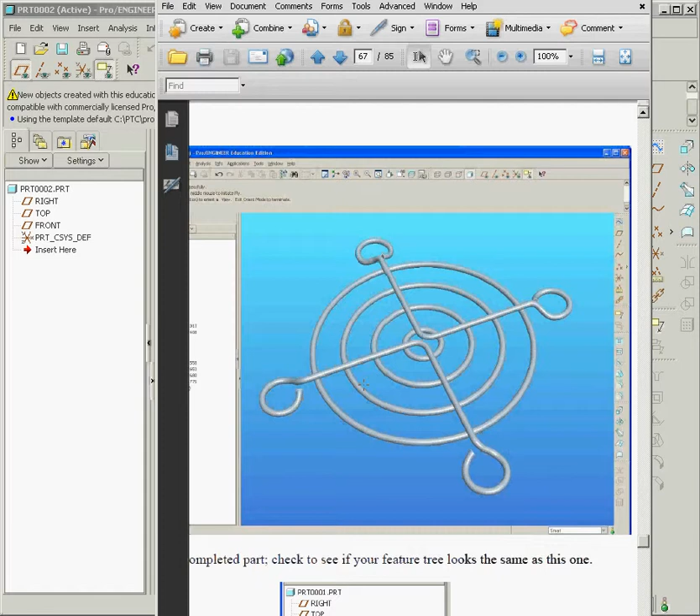The goal here today is to create what you see up on the screen: a fan grill that you would find on the back of a computer. Basically, we're going to use projected curves from a surface and then sweep to generate this.

Let's take a look here. We begin by starting a new part file and select the front plane and start a sketch. First thing we're going to do is build one of the feet. So we'll hit sketch and zoom up until we don't see any dashes between the crosshairs.

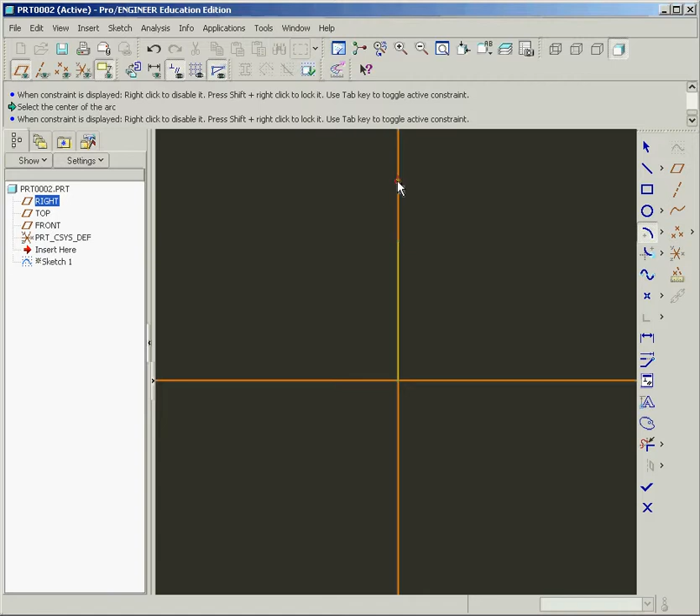Then click in the center here and drag up a vertical line, middle click, and find the center and ends arc. Move it a bit above the line you just drew, click down, connect it to the vertex of the line you drew, click again, and drag around. It'll leave a little opening on the left hand side.

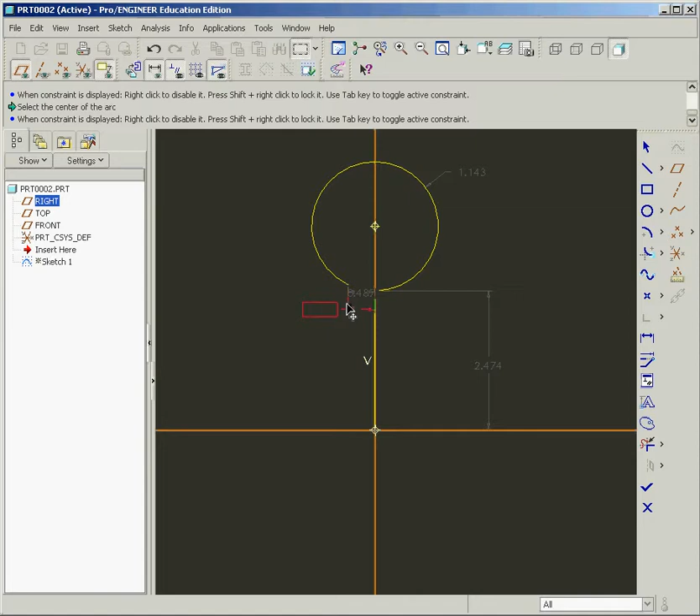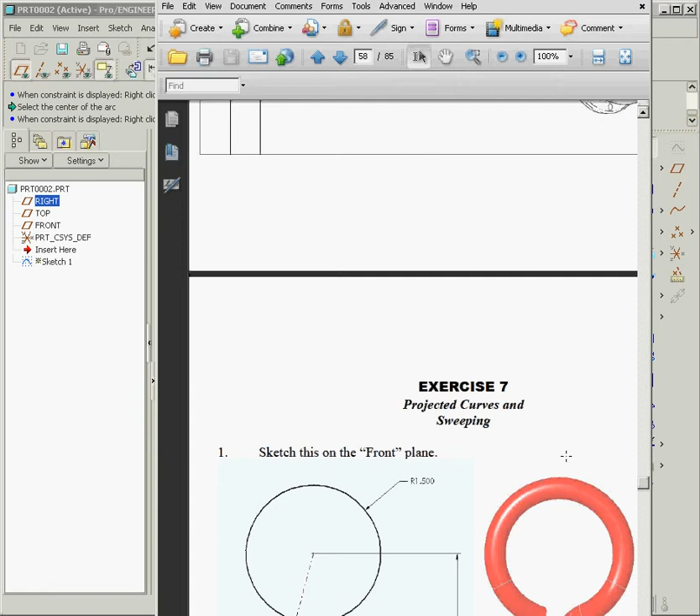Click the middle click to complete it. Now we can see some of the dimensions that are given here. We'll make sure we follow the instructions for the parameters. As you can see, we need a radius of 1.5, 15 degrees of the angle where this point stops according to this vertical line, 1-inch radius, and 4 inches from the center.

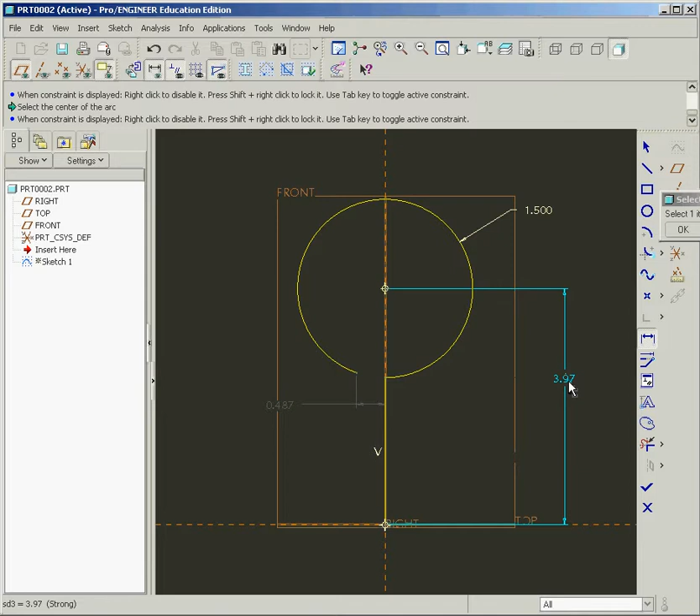So we'll put the 1.5 up first, and we'll add a dimension here. We'll go to the dimension tool, select from the very bottom to the center point, middle click, and that will be 4. Then we want to get rid of this dimension.

We'll select the line tool and draw a line from here to here, and then middle click. If you middle click again, you can select that line till it turns red, right click, and turn it to construction.

Then we could go to the dimension tool and add our dimension between that line and this line here. Now we just put in our dimension of 15 degrees.

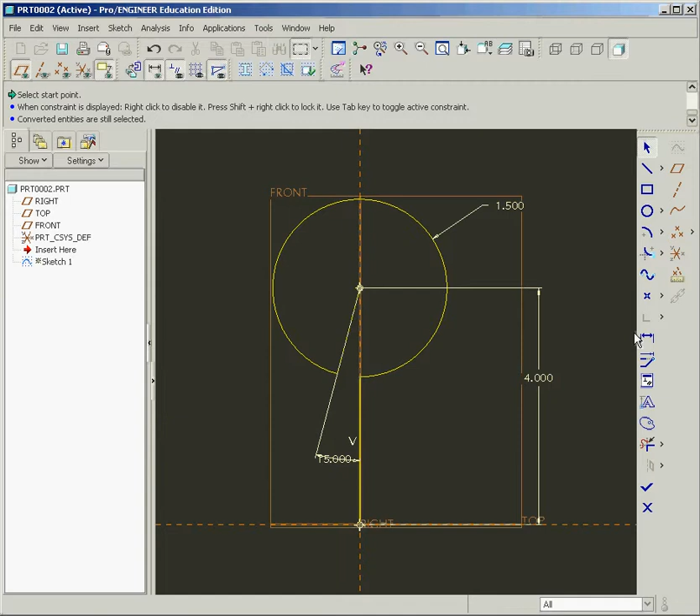The last thing we want to put in is the fillet, or the radius here. So over here we could go to the sketch fillet and select the 2 lines, middle click, make sure that's set to 1 inch, and then trim out the additional material using the trim tool.

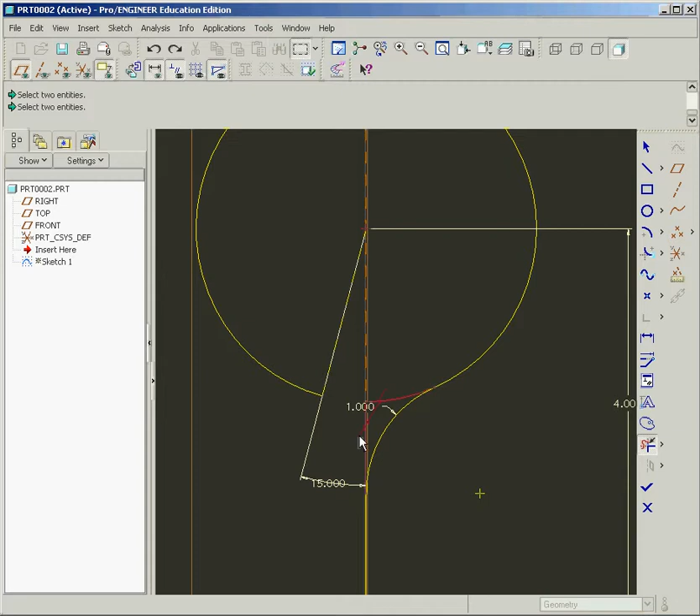Oh, actually did too much there. Not a bad idea, maybe to zoom up and grab it. And you're done. Hit the done tool.

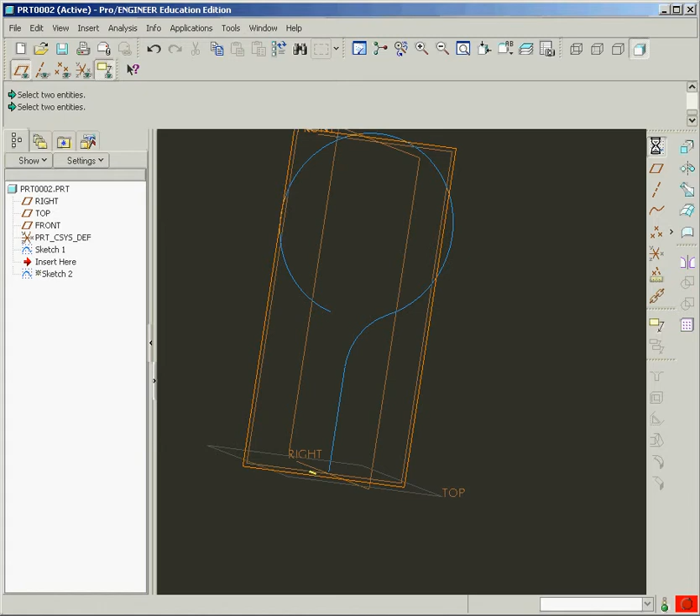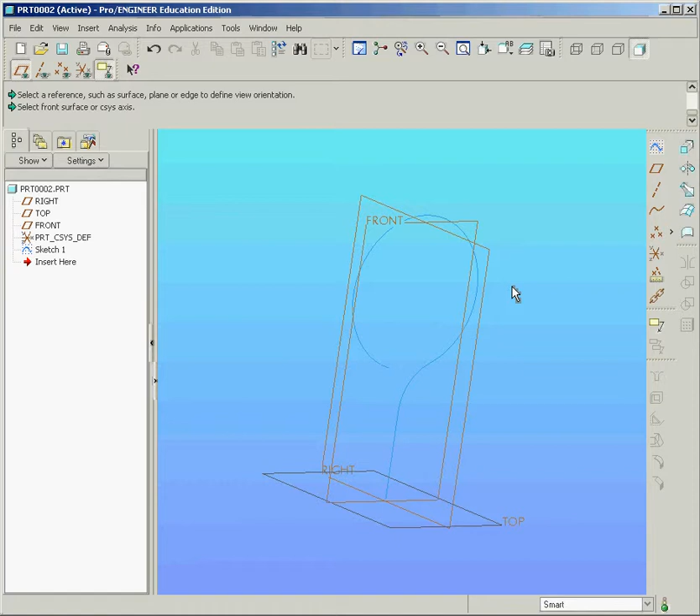Okay, now that that's completed, we can go ahead and sketch on the right plane. So we select the right plane - in this case I accidentally selected the wrong one, so I'm going to hit cancel here. Then go ahead and make sure you select the right plane. Start the sketch, hit sketch.

Now we have to draw the second profile that's in the book here. You can see this is laid down horizontally, so it may not look exactly like your screen, but it's a series of just a line, 2 arcs, another line at an angle, and a horizontal line. So we'll just go ahead and draw that.

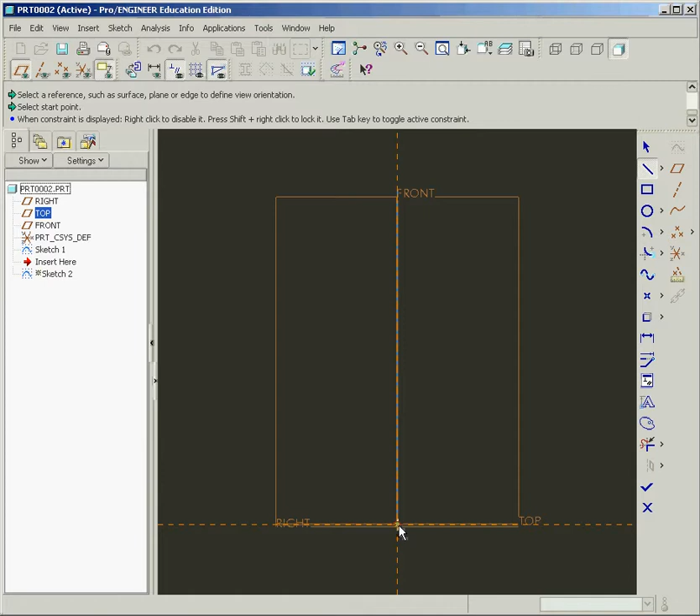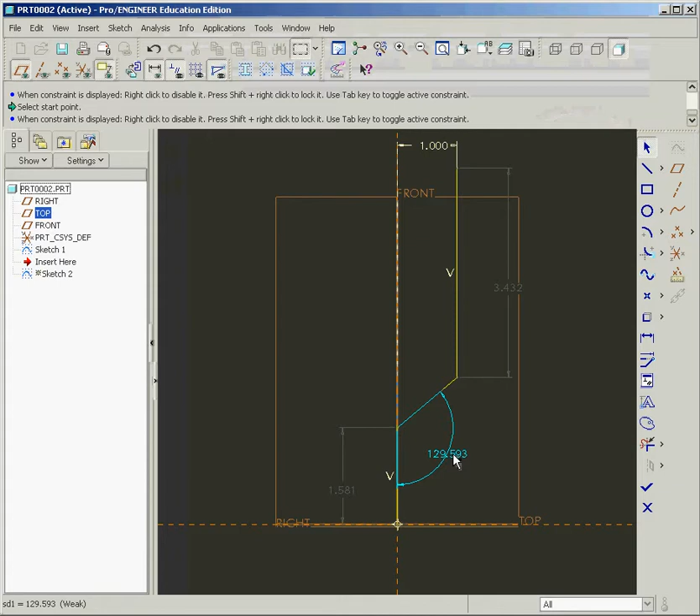Taking the line tool, we'll start off by drawing a vertical line, an angled line, and another vertical line. We'll let the dimensions take some control here. This will be 1 inch, and this is going to be 130. This, we'll set that to 4 right now.

Actually, we'll go ahead and change that in just a moment. That, after the radius, will end up being 2.25. So let's go ahead and put the radius in.

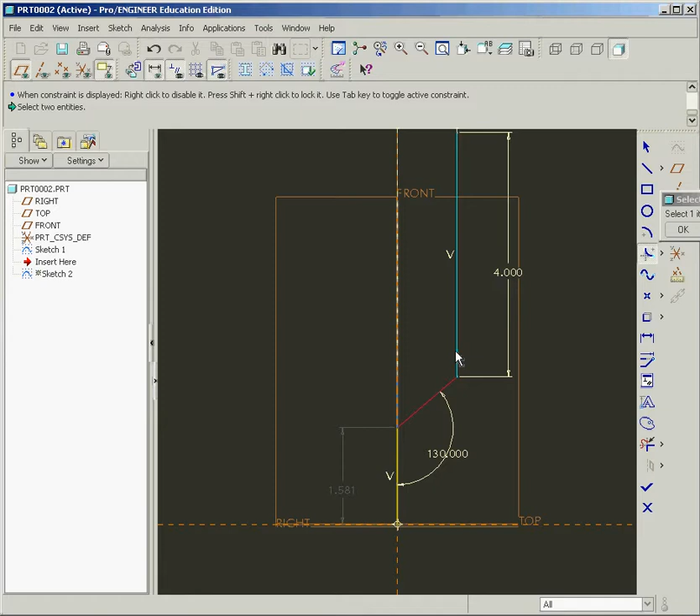So we go ahead and select here and here, and here and here. Now each one of these will be 1 inch. And then we could finalize with dimension here, and that will be 2.25.

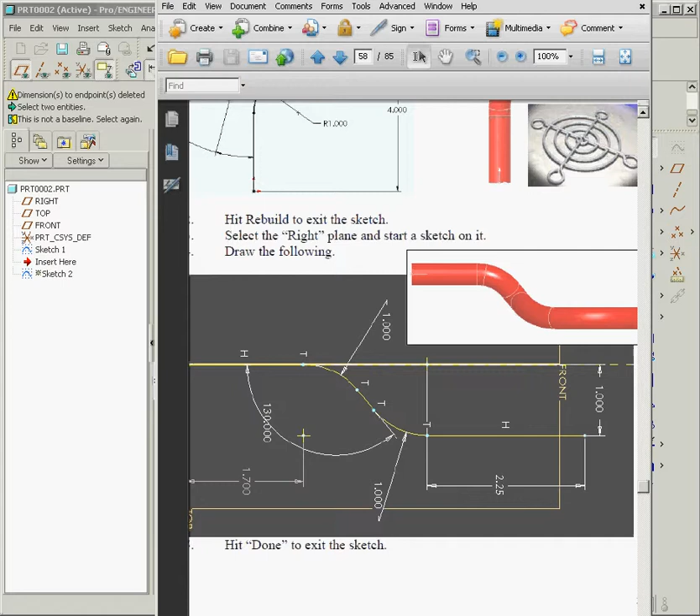And then the last dimension will be 1.7. Okay, and this will be 1.7 here. And that's it. Now we could go ahead and hit the Done tool.

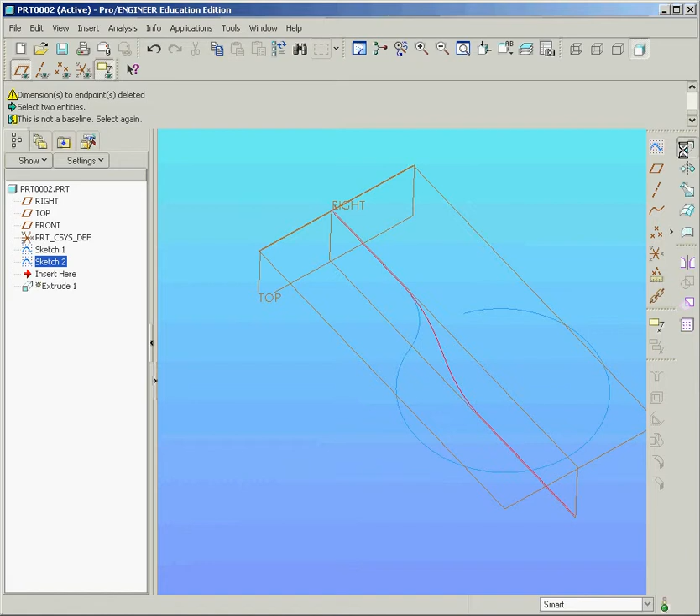What we're going to do with that particular curve is extrude it as a surface. Because it's not an enclosed boundary, we just go to Extrude, and we want to make sure it extrudes in both directions, so mid-plane, 4 inches. And hit the Apply button.

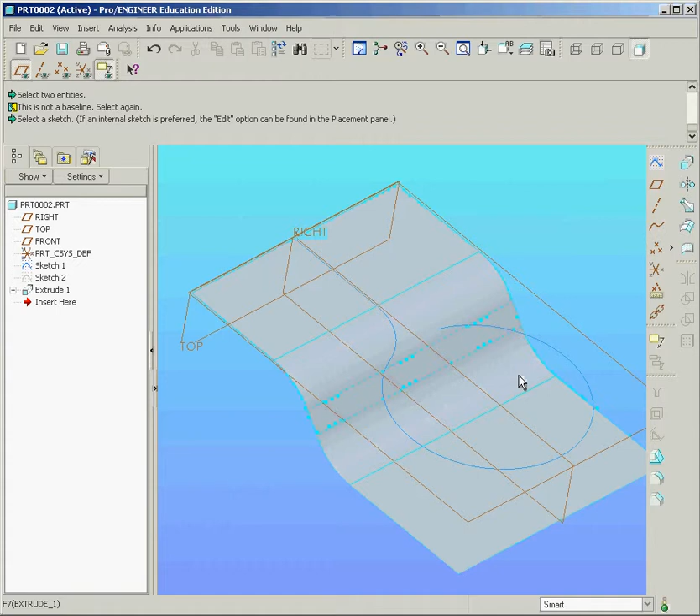The next step is we want to go ahead and project that curve onto the surface. To do that, we find a tool under Edit, Project. Under References, make sure it's Project a Sketch. We could select the sketch actually right there, that's a little question mark looking sketch.

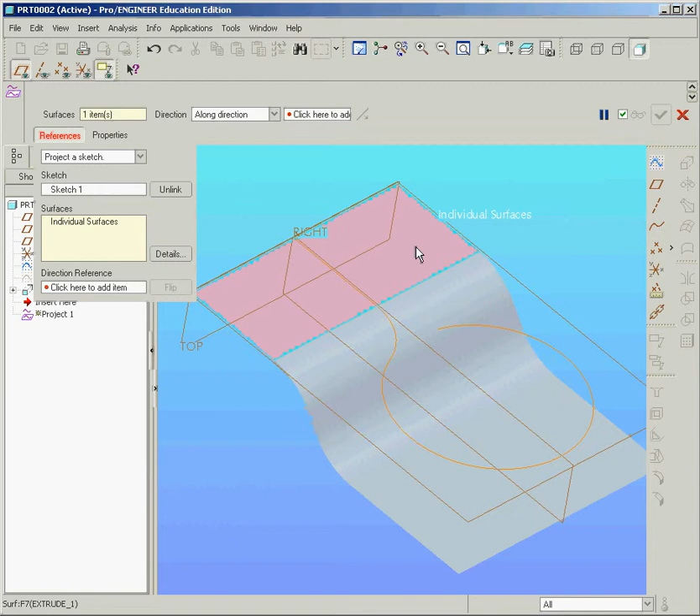And then the surfaces now, we have to go ahead and Control Select all of them. They should all turn pink. And then finally, a directional reference. In this case, you could select the actual front plane and then flip the arrow, so it projects down, and you'll see a preview in yellow of what it's going to look like.

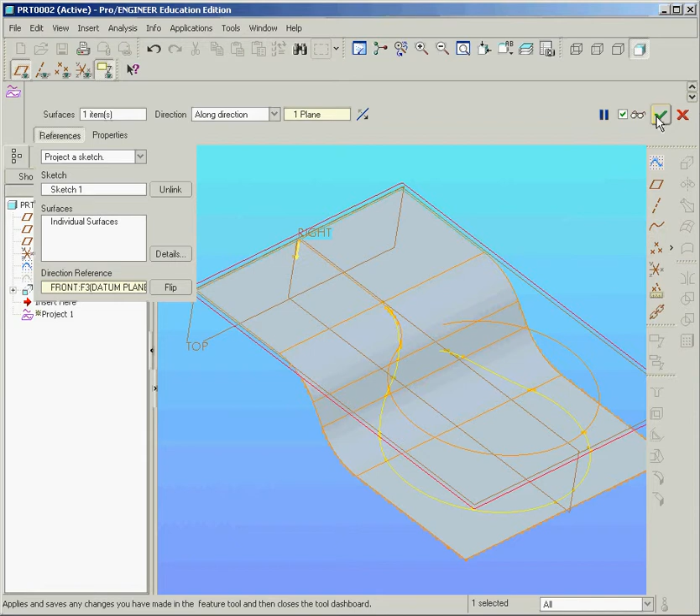And then we just hit the Apply button. Now we have a curve projected, basically a 3-dimensional guide curve that we could use. So now I'm going to go ahead and just right-click on this, click once on the surface, and then right-click and select Hide. We don't need to see the surface anymore. Now we have our geometry.

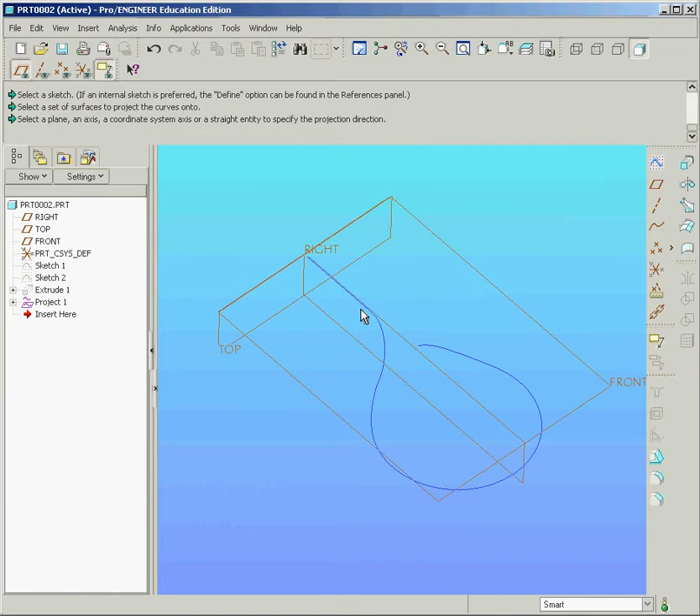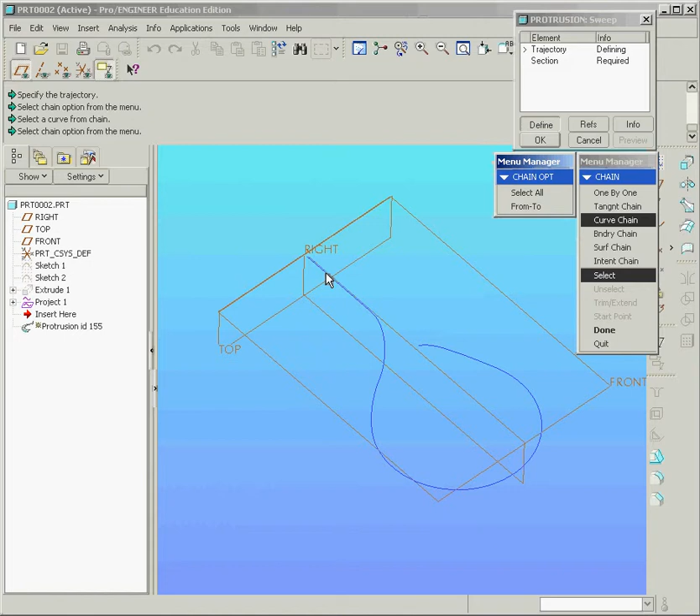So for this now, we're going to go ahead and create a sweep protrusion. We go to Insert, Sweep, and Protrusion. We want to go ahead and make sure we select the Select Trajectory, and we could go ahead and select from the menu manager, be sure you select Curve Chain, and select somewhere around here, and select all, and you should get a little arrowhead there.

Now if that doesn't come up, you could click on Start Point and flip it, and if it comes up somewhere else, make sure it comes up on this end, make your life a little easier. And then hit Done, and OK. And now we're sketching.

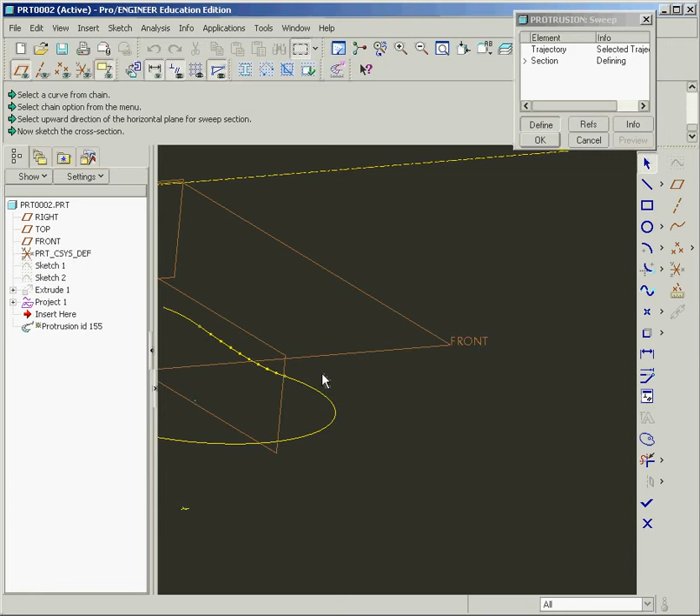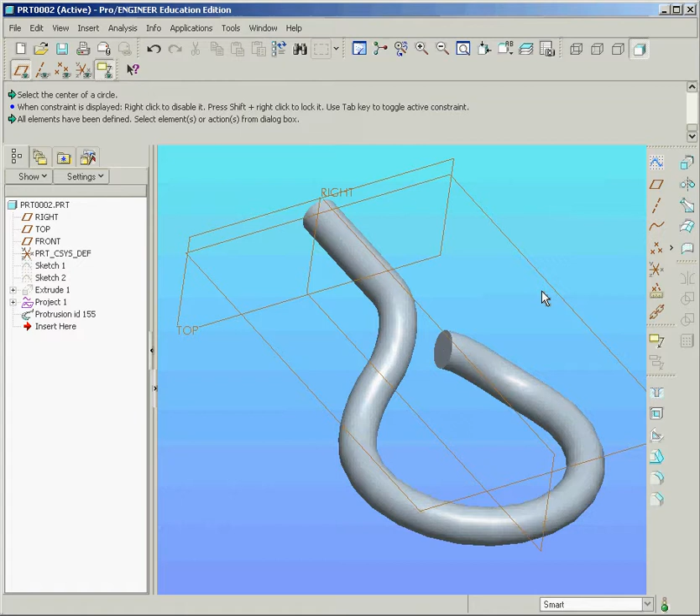Now what we want to do is sketch a 1/2-inch diameter circle on that point. So we just go to the Circle tool, sketch that out, type in 0.5 actually, hit Done, and OK. And it sweeps our hook across. So there now we have our hook part of our geometry that we needed.

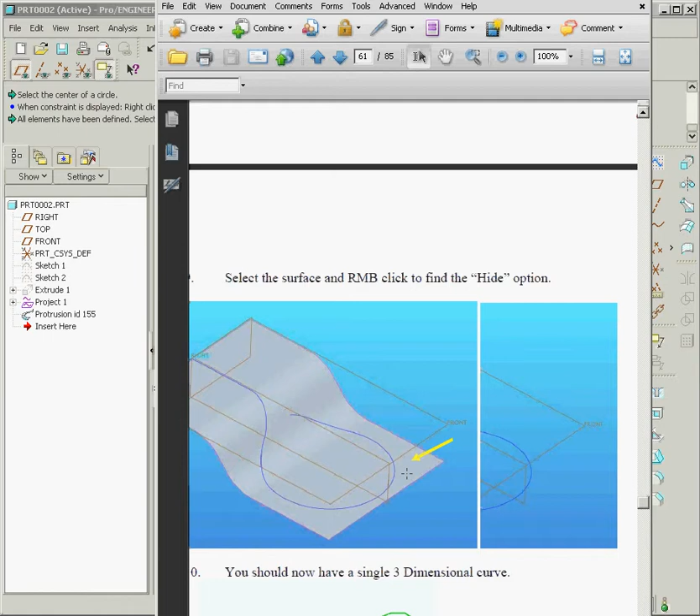Moving along here, now the next stage is we're going to go ahead and add another feature here. We're going to make an extension. Now we could have done this all in one shot, but I just didn't want to have too much information in the sketch initially. Not that it would hurt anything, but for a learning experience, let's just take bite-sized chunks versus trying to do the whole thing.

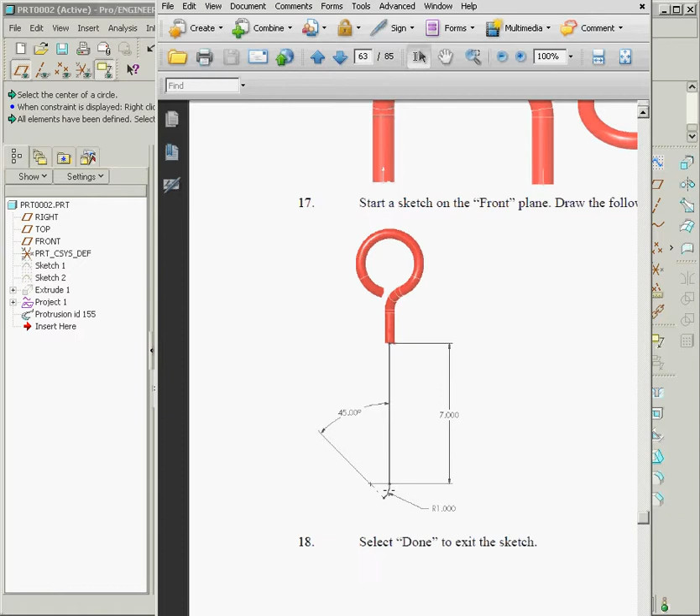And what we're going to do is we're going to end up drawing just a 7-inch line off of there, and then a 1-inch radius that's cut off at 45 degrees. The reason for that is so we can mirror it after it's swept through and get a 90-degree elbow, as you see right here.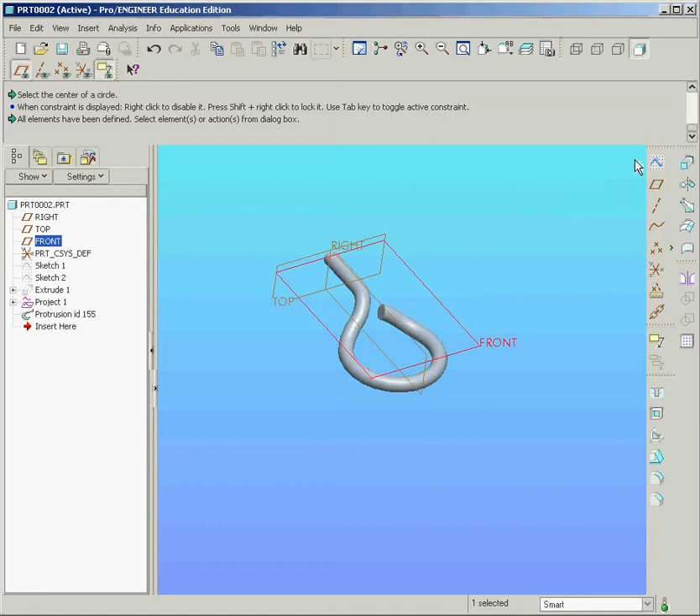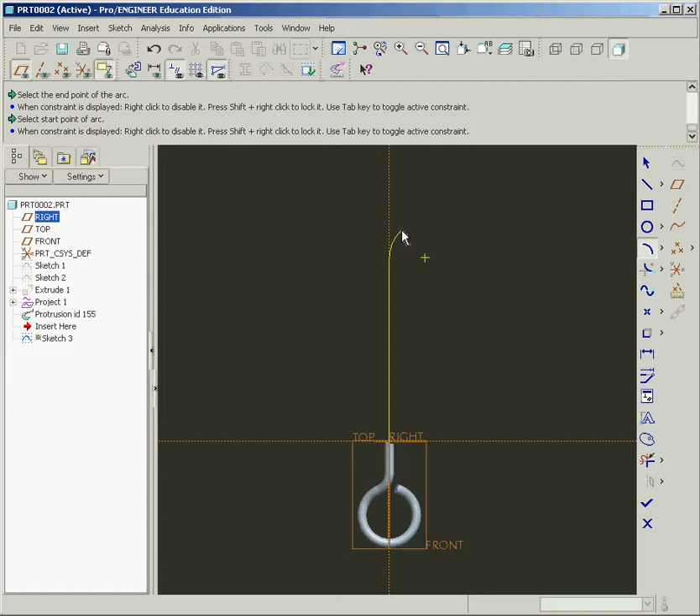So let's go ahead and do that. 7 inches, 45 degrees. We could select the front plane to start our sketch. Zoom out. Draw a line right at that point. And then go to the tangent arc and click, actually wrong one there. Click and drag it straight out and to the right a little bit. Make sure you don't snap to 90 degrees.

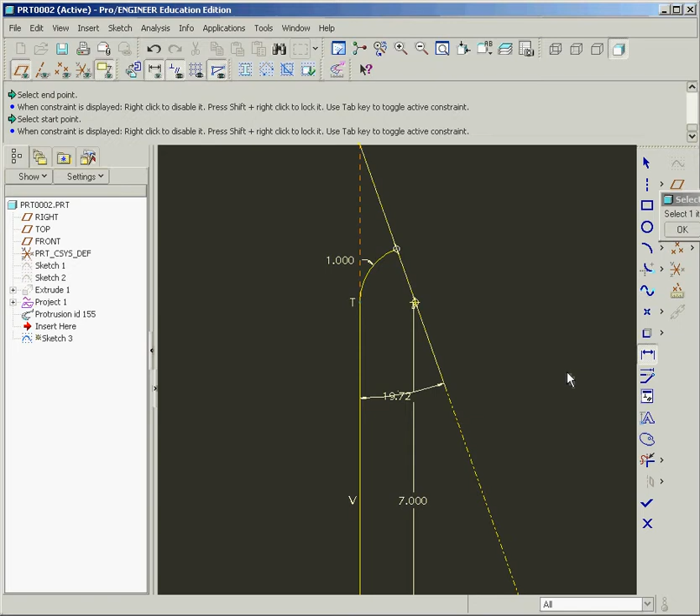Then put in the dimensions, 7 inches by 1 inch, and we could actually use a center line here, and instead of having to do all that extra information, just put a center line between those two and use the dimension tool to constrain that, and that will be at 45 degrees. Now we could just hit the check mark to apply.

And now what we want to do is we want to go ahead and take that geometry and do another sweep protrusion. So insert, sweep protrusion.

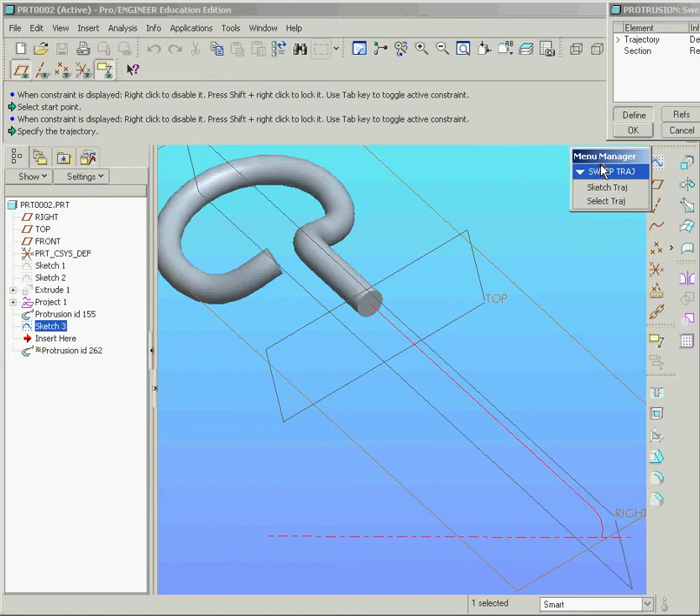Under here, make sure you select trajectory and curve chain. Select near the end there. Select all. Now in this case, I'm getting my arrowhead over here. This is where I could select start point and hit next, and it will move it over here. Unfortunately, we don't get a good picture of it, but we could accept that, and now you'll see it's there.

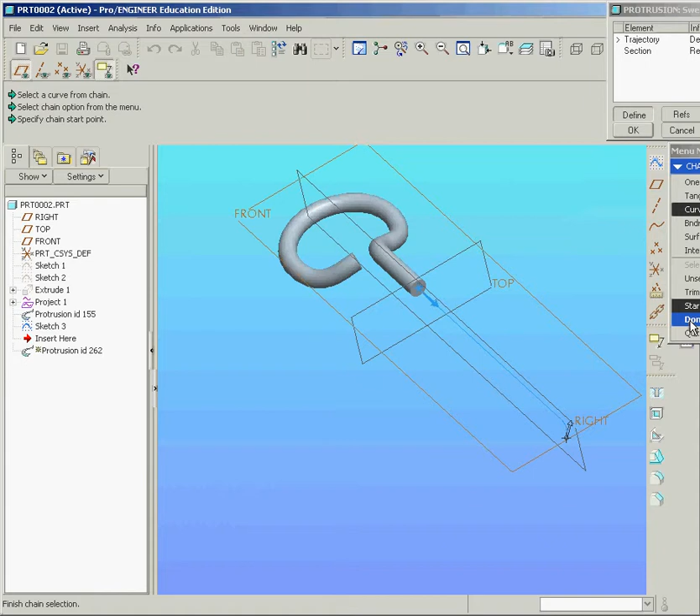So we hit done, and done, and it will start sketching on the end of that.

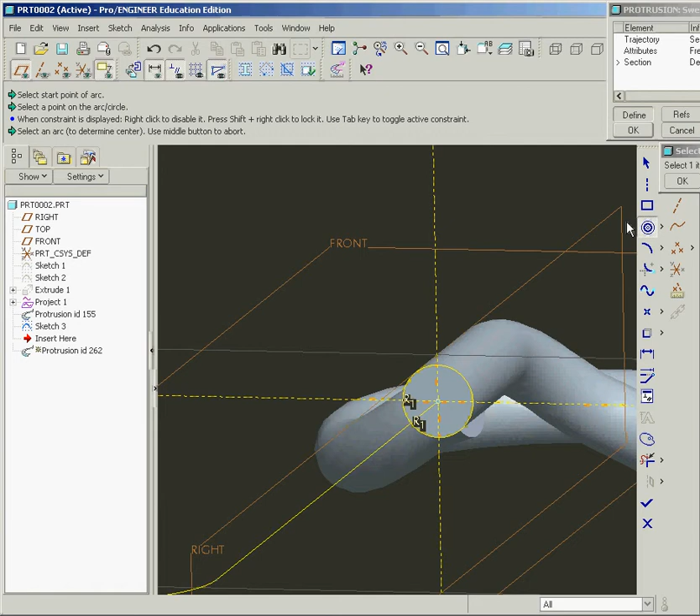Now what we can do here is steal this edge by using not the circle tool, but the concentric circle tool. So concentric circle. Select this edge here and make sure you get the R1s to snap. That means it has a relationship to make it equal to the other side. Hit OK and hit OK. Hit done, and then you could hit OK.

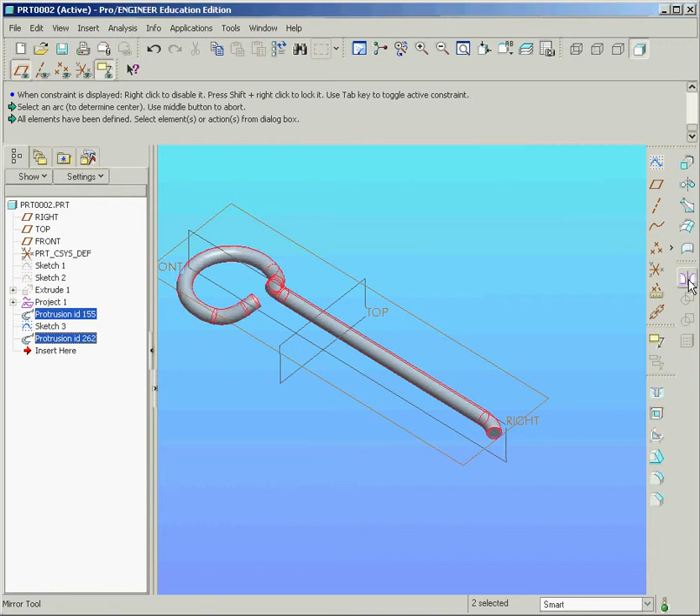And there it is. Now we want to mirror this over. So what you want to do is in the feature tree, hold Control and select both protrusions. Then over on the right, you should find the mirror tool. Select it, and select the very end face here as the mirror plane and hit apply.

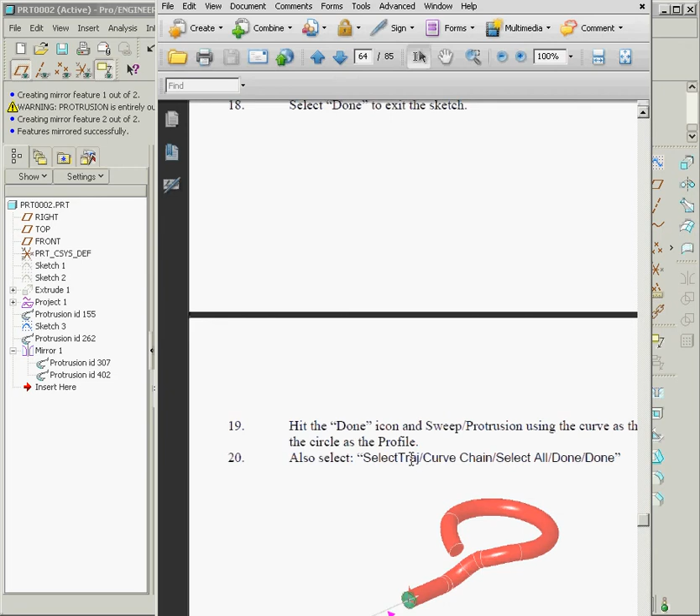And now you should have your elbow completed. Now, the next part of the manual, I get you this far, but with your experience now, you theoretically should be able to finish this. I do give you a little drawing with some information on what you need to do, in this case to make the concentric rings and then mirror over the other geometry. But I'm going to give you some hints here and assist you to get this done.

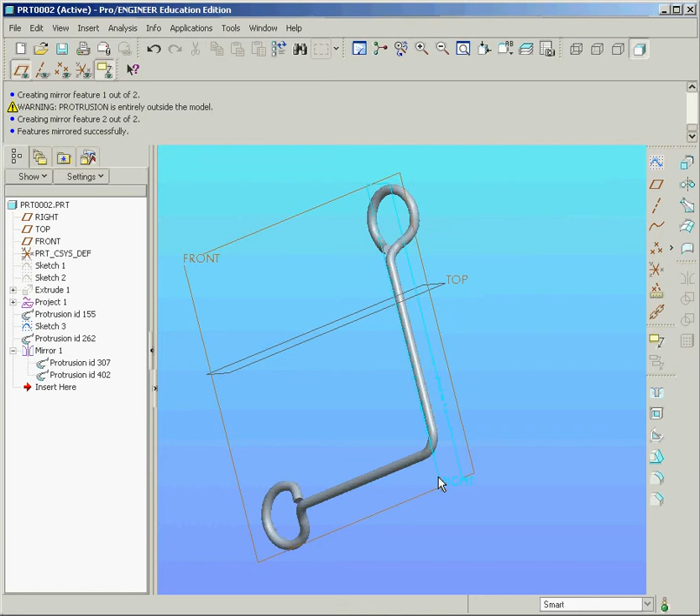So as you can see here, the spacing is about 2.5 for each of these concentric rings. From the center is 1.25. So we have to locate the center to get those in, and they're a half inch diameter. So we could actually select the right plane and start a sketch.

And what we first want to do is go to wireframe up here. Select the wireframe option and zoom up where the elbow occurs down at the bottom. We're going to select the concentric ring, select the edge and make it equal size, and then middle click, hit OK. Now we might want to right click and change it to construction.

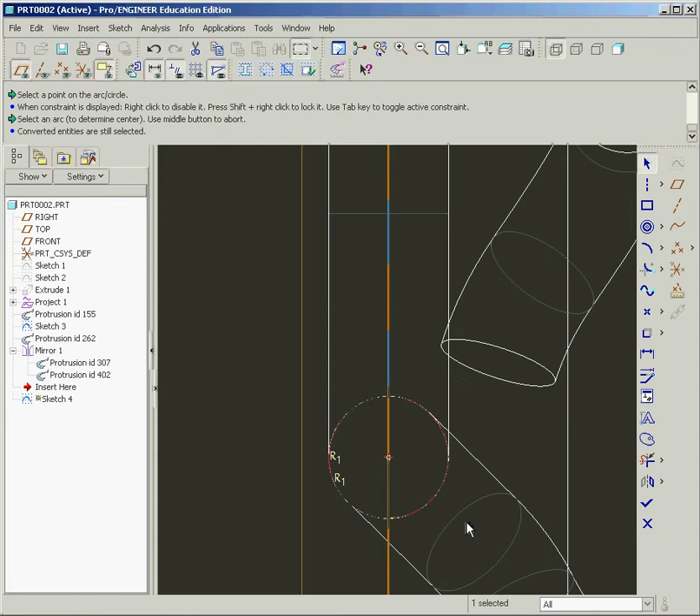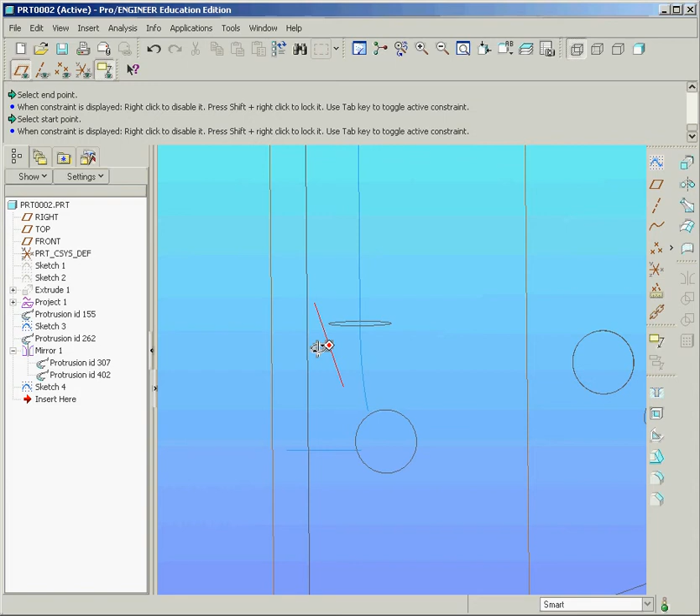The only reason I wanted to do that was to get the center point. So I could select the centerline tool here and draw a center line off of that. Actually, we might want to draw a solid line just in case center lines don't always show up in the sketch. So draw a solid line over that and hit the done tool. Now we have an axis of revolution, basically, which is the center of our component.

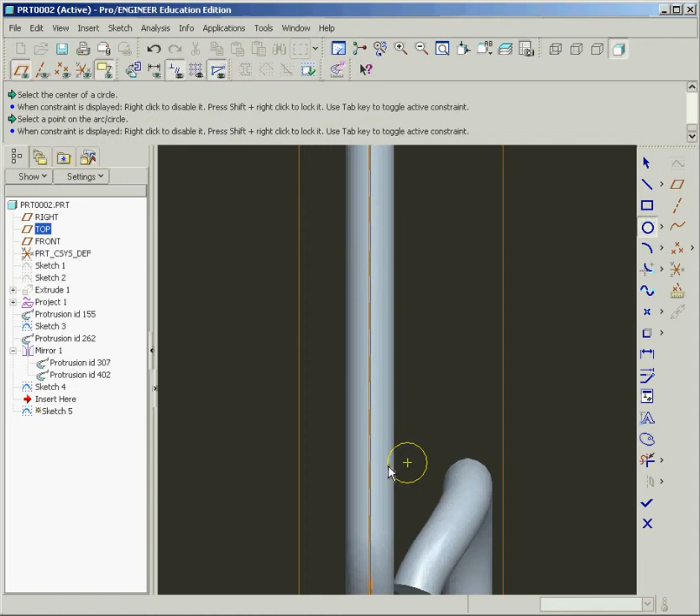We could go back to shaded mode, and now we could go ahead and select the right plane again and start a new sketch. From here, just use the circle tool, draw out a circle right about here, and another one of equal size. Make sure you get the little R1, and make sure they're all aligned.

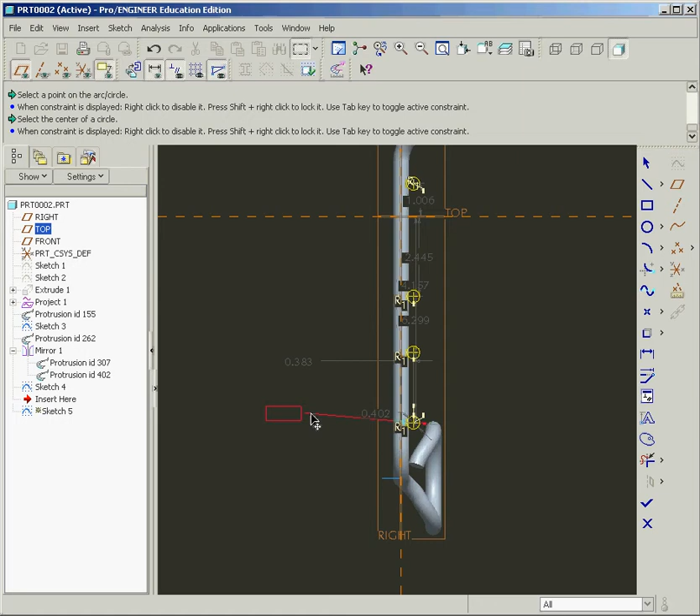And we should have 4, if I'm correct, in here. So we'll just draw one more over here. We get some dimensions. Let's go ahead and use the dimension tool to override some of them. We'll select here and the center point there.

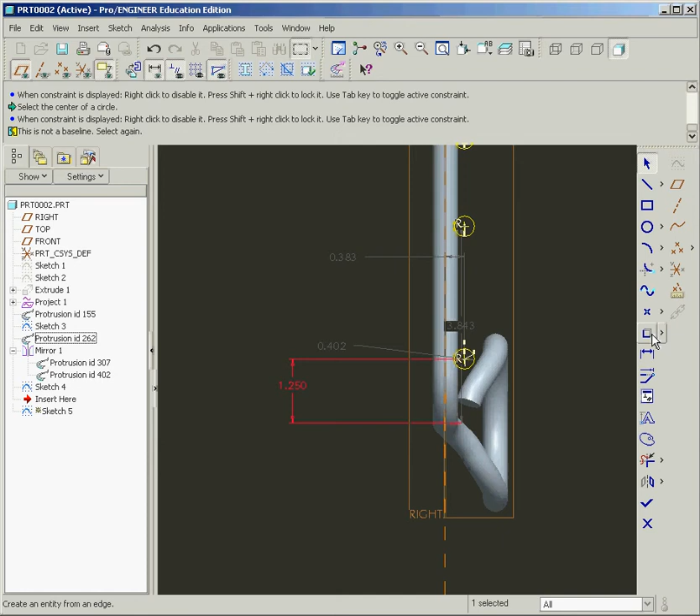Make sure we get the 1.25 - let me just make sure here. Yep, 1.25, and then the rest are 2.5. So we could go back to dimension and just override the ones that are there, and make sure all these are 2.5 for the distance.

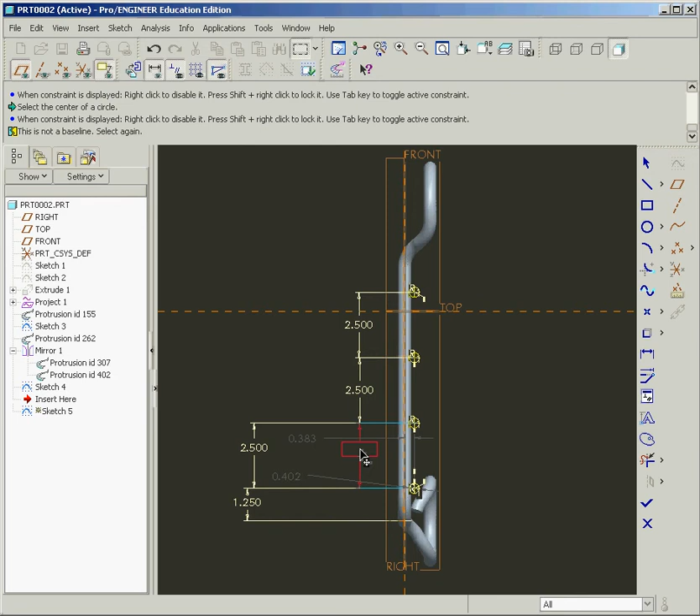Then you might want to lay them out nicely. The diameter of this one will be 0.5, and since they're all equal, they'll all update. Finally, the dimension for this will be 0.49, so that it just digs in a little bit, connecting itself, just like if it were welded a little bit.

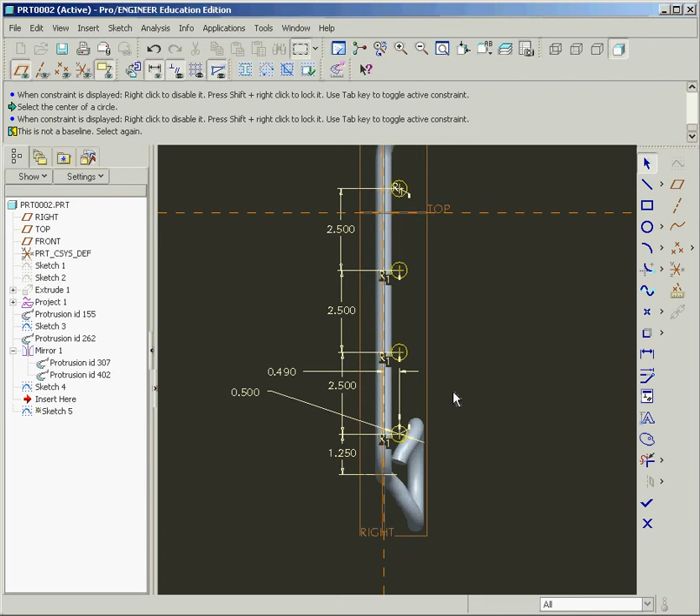Okay, now we're ready to go ahead and revolve. So we could go over here to the check mark to hit done, go to revolve, and for the axis, select that little blue line that's down there that you drew earlier. Now we could let it go all this way around and then locate a plane and mirror this elbow over, but here's something else we can do.

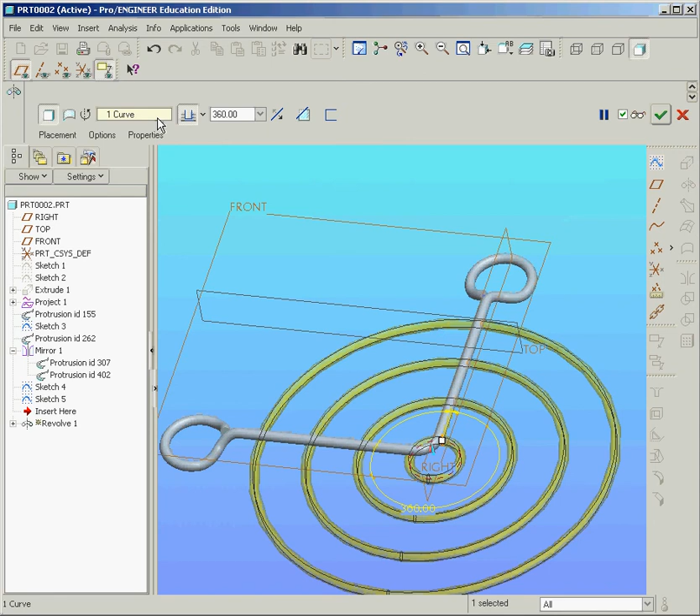Under options, you could set it to variable, and instead of setting it to 360, set it to 45 degrees variable, and then the next option down below, set it to variable as well, and make it 135. And 135 plus 45 equals 180 degrees, so you're making exactly half of your geometry.

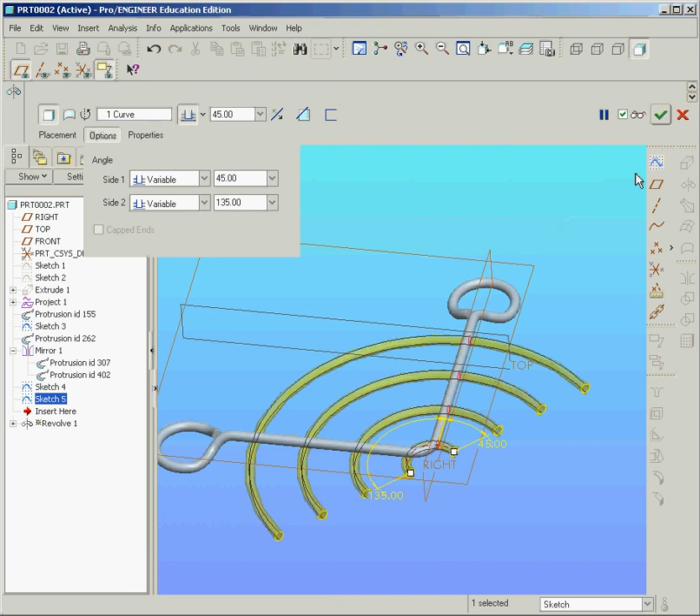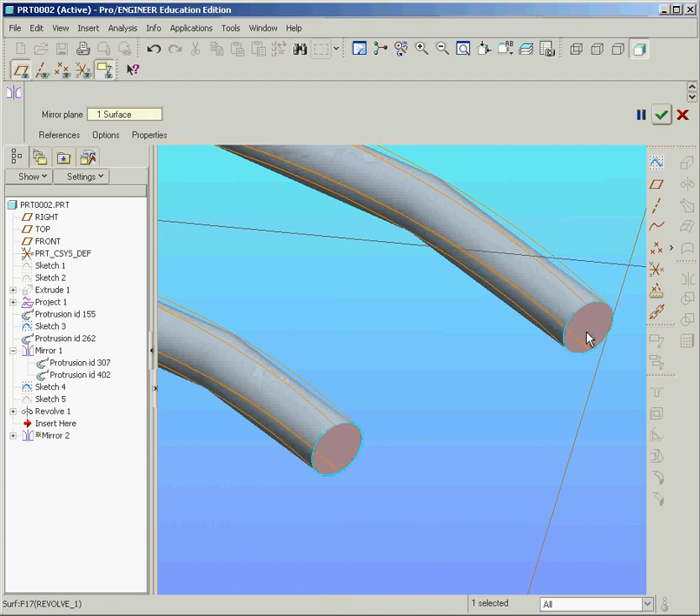The next thing you can do is now just go through and hold control and select from the feature tree all the features - every protrusion, the mirror, and the revolve. Go to the mirror tool over on the right, select one of the end faces, and hit the check mark, and you're done.